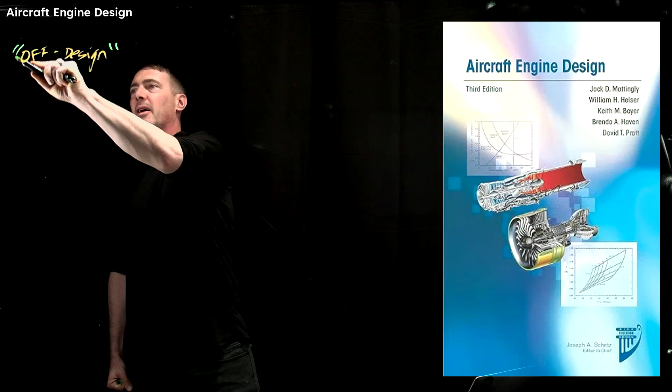And so, chapter 5, this is going to be really funny, but I'm going to call it "off design," and I'll put big fat quotes around it. Like I said in the last video, off design is basically where these jet engines live. It's never just perfect conditions. Your jet engine depends on altitude and speed, so altitude and Mach number.

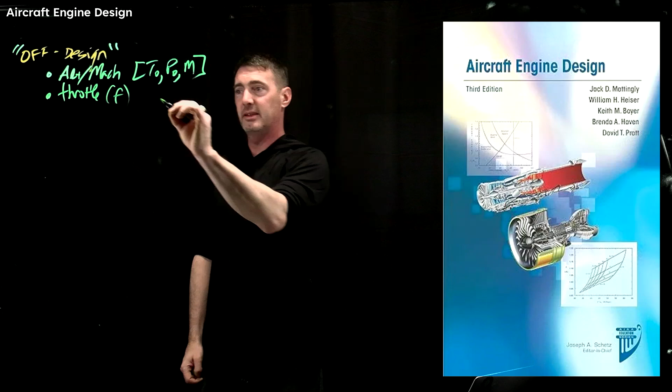Why? Because that's going to drive the temperature, the pressure, as well as that Mach variable, which everything falls out of. Then your throttle is nothing other than adjusting your fuel-to-air mixture, remember F back in the day. That's going to set your T4, and you can think of setting your T7 with your afterburner, AB. So your two fuels, fuel in the combustor and fuel in the afterburner, set those two temperatures, and that's the limit you pay attention to. This is your turbine inlet temperature, and this is your afterburner temperature.

The only other control you may have as a pilot is your nozzle ratio. If you have a pilot, the system can adjust it. It's usually automated; it's not that pilots are sitting there fiddling with their nozzle ratio. It's usually on a schedule, based on pressures and things like that. This is going to help set that P0 and P9 configuration. Again, back to jet efficiency being important. And everything else, the areas, are fixed. The consequence of that we'll show in a second.

But where I wanted to start is two really good graphs that I wanted to show you. The first one: Embry-Riddle Aeronautical University has this book online, Introduction to Aerospace Flight Vehicles. I think it's actually a phenomenal book. It covers so many things. I probably won't do that as a book club because I'm already doing a bunch of different portions, but it really is great, and this graph I've not found anywhere else. So I love what they've done here.

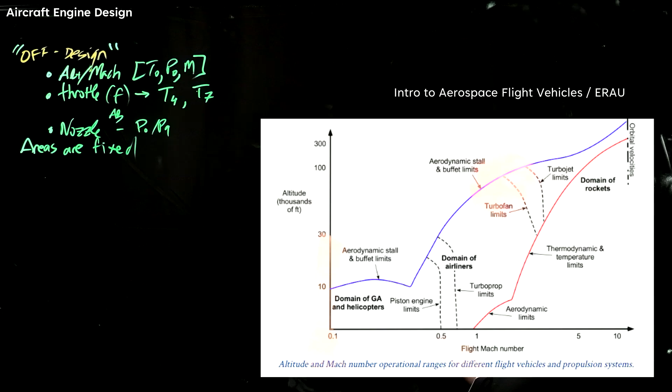Orbital velocity is actually Mach 25, so it sort of makes it appear like it's Mach 10 here. It's really Mach 25, which is probably the right line. Without the dash marks, you can't tell that on the log scale it's really at 25. So this is just a great diagram.

Now a lot of people will highlight this and look at it like, oh yeah, you can breathe air on your way to space. You can - that's this whole idea of scramjet, single stage to orbit.

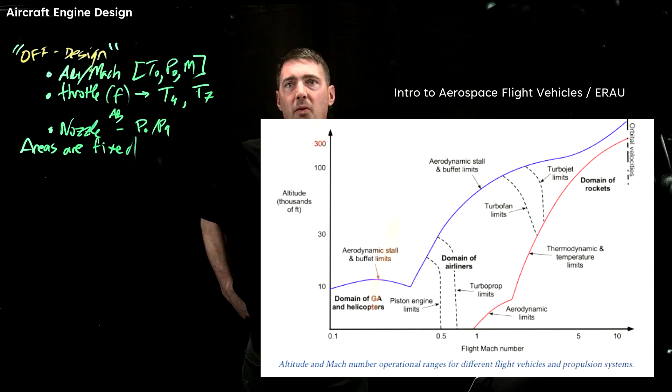There's other stuff in here. On scramjets, there's temperature limits based on the air getting crazy hot. So even burning fuel, where it's actually adding energy to the air, becomes really challenging. I'm not going to get into scramjet world, but just know it's pretty brutal. Honestly this is the standard thermodynamic curve. There's another one that pops up when you start accounting for skin friction, which I don't know that it's accounting for appropriately. It really starts eating your lunch.

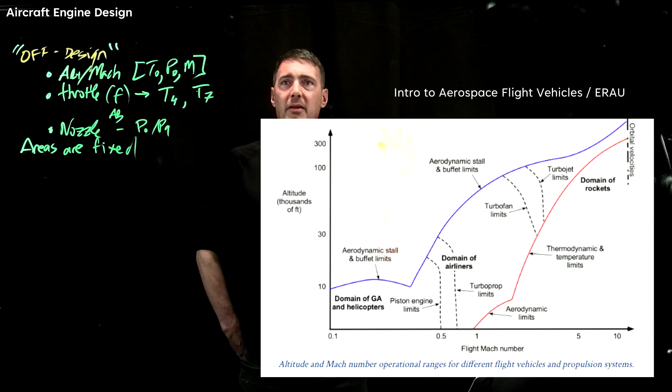All right, but this is a great diagram. Now the other one, I actually can't find the source. I was Googling for a picture that looked like this. I don't like dropping things here that I don't find the source to, so I'll put it out to the internet.

It just says 5.2, adapted from 1. This is the only picture that showed up on the internet. I would love to know where this picture sits so I can cite it properly, but this is basically your engine thrust to weight ratio, because there's your jet engines at 7. Afterburners usually give you double the thrust for a lot more fuel usage - that's usually the way it works.

And then ramjets here - I would love to know where this curve for ramjet is really coming from. So help me out, dear internet, help me figure out where this picture is coming from. I thought maybe because of the blue letters here, it was Raymer. This looks like an AIAA book, I just can't figure out which one. So please help me out, dear internet.

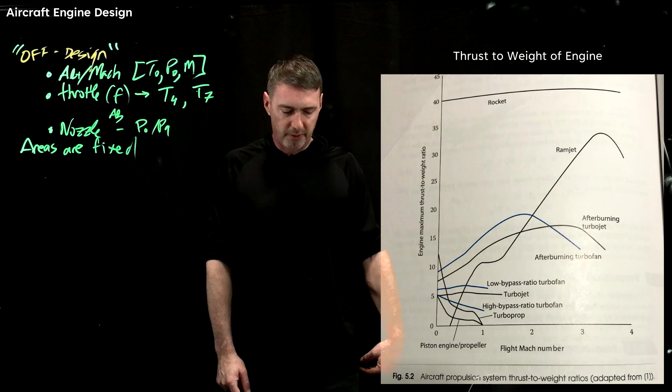Okay, those are kind of two great pictures cleared out to help out here. And the rest I'll sort of draw by hand to make sure I can highlight the right stuff. And so from all of this off-design, what you then have is a couple different things.

So you might look at the compression ratio of the fan versus m dot corrected. Now this is where I know industry has got these conventions, and I really hate them. It's not - if you're in the industry, it's okay. Some of the stuff is like industry does things that they may have done in the 50s and 60s because you can't have computers and you can't calculate all this stuff. But this m dot corrected one really drives me nuts. I'll just write it here because it is...

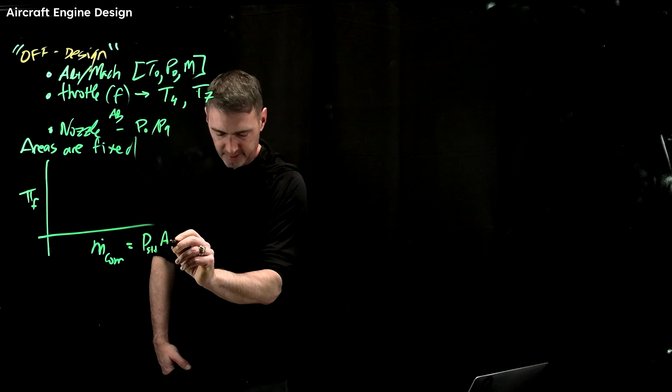...basically this: it's the pressure at standard times area over temperature standard, times this thing called the mass flow parameter, okay? And so it's supposed to be correcting the mass flow parameter back to standard pressure and standard temperature. Now, maybe this is from the jet engine testing world where you have these mass flow parameters of, hey, the engine's at this altitude, but we're testing it at sea level. I actually don't know the history behind this. I'll go dig with a couple of my friends who have worked in this industry, and I'll make a note below if I find out where the root of this really came from.

Because then you then ask, well, what the heck is the mass flow parameter? What you see is that it's just m dot times the total temperature, over total pressure, and the square root's only on the temperature, which basically undoes it. So the best as I can tell, the m dot corrected is just the m dot, unless I'm missing something. So this is the kind of stuff that bugs me - I don't really understand why.

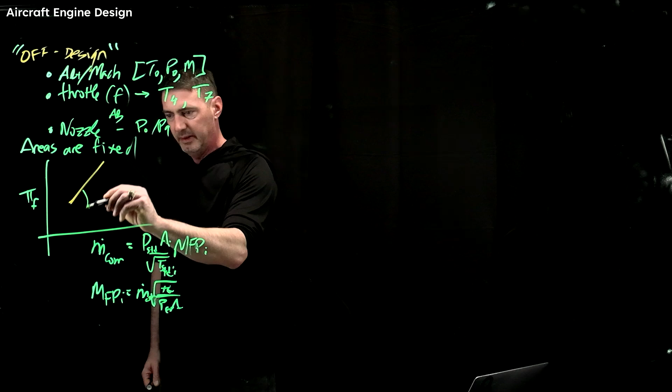But the main point of this was that here is your stall surge line, and then you're going to have the performance of your fan, and each one of these is percent, and then capital N - this is your RPM of your engine. So back to what you can actually control: your aircraft, you can fly it to different altitudes and Mach numbers. Your throttle is throttle, it's fuel. But what a pilot is going to do is operate the throttle, and the result of throttle is going to be an engine RPM, and that's what the pilot's going to see.

And so they're going to effectively adjust and talk about like I'm at 100% throttle, I'm at 50% throttle, and that would actually mean here is RPM, not necessarily fuel load. Okay, and then the control system is taking that input and converting it to a fuel flow rate, things like that. So it's a kind of scheduled system. So this is what's going to happen here.

Okay, and that's on the fan, and then basically the same sort of thing. You'll see the picture on overall compression ratio, which again I'll draw this sort of line. That's the stall surge. Your compressor can stall. It's a blade. We'll get into that in the next video on components. But your compressor is a blade. You can stall it, and you can surge it.

So then again, here are these performance characteristics of efficiency. So these are curves of engine efficiency, where you might want to sit based on your off design. Again, the altitude and Mach number you're at, you may actually be sitting on these weird systems where, again, I'll draw these in orange, where this is your percent throttle, your RPM as a percentage. Okay, so that's one.

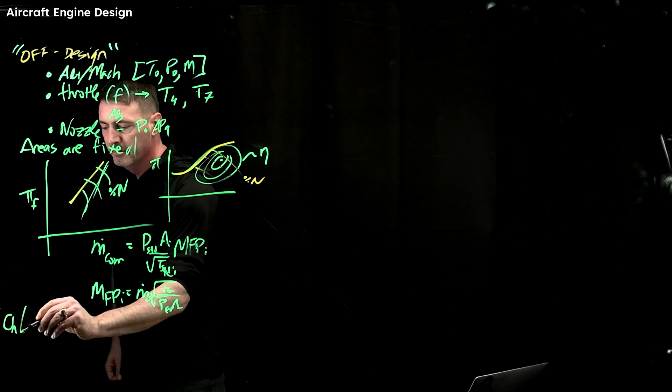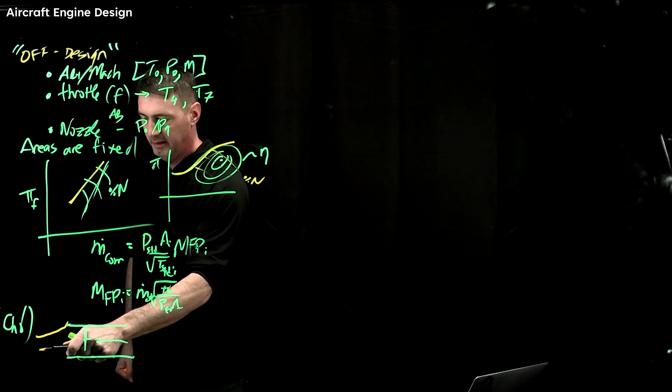Other off designs, and this is now kind of into chapter 6. So I'll do it here at the bottom, where hopefully you can still see. And hopefully you'll laugh with me: what do you mean these are off designs? Well, okay. So here's your engine. There's your blades and your core and all that stuff. Well, this is your inlet, and the air going into your inlet is not the same area. It could be down like that. At some speeds it could be up like this.

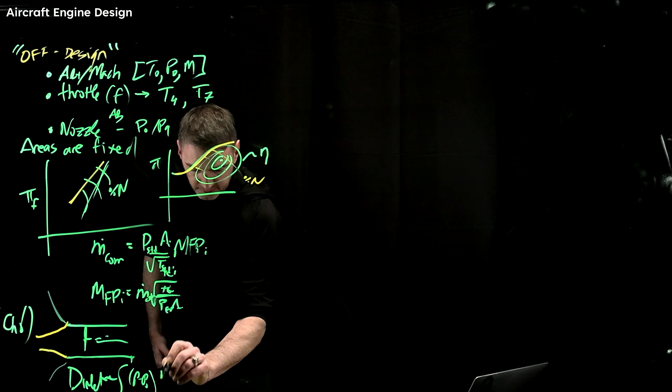So it's your inlet, and then there's also the drag associated with your inlet, which is the integral going from 0 to 1 of (P minus P0) dA. Your inlet drag can actually drive a whole lot of things. So what I'm going to show here is inlet drag versus Mach number, and it can show you a couple of different choices. Honestly, the drag numbers here might be only 4 to 5% if you have a very thrusty engine, if your F over m-dot A is 4. That would be like a high thrust F-16 style engine. Might be 4 to 5%, but could be as big as 50% if you have a wimpy engine.

If it's this large, I think 0.5 sort of a thrust. It's like the thrust compared to the flow rate of your engine. Basically, it's a way to show engine size, like frontal area, effectively the engine size. So it could be pretty damn large. All right. So that's inlet. That's on regular subsonic inlets, and then as soon as you go supersonic, they cover that in this chapter as well. Okay. So again here's your inlet.

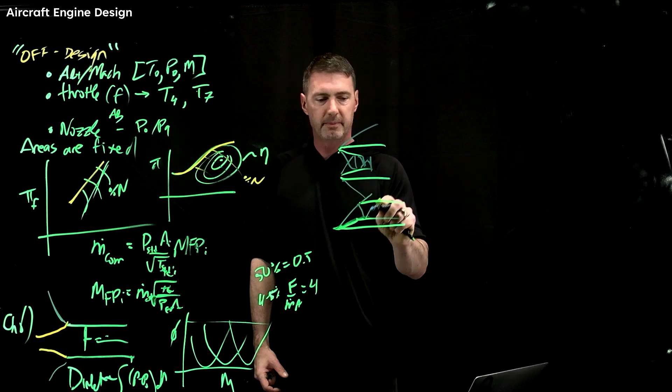The F-16 basically has a mouth inlet, and then you get these shocks. Okay, the shocks that stand up, and then you get a normal shock. So it's a very simple design inlet, but it builds up quickly, and then you can also get a shock that runs external off your engine, of course. That can also highlight your drag as well as affect your compression. And then there's internal compression, where you have a ramp like that, and you get that shock here, and then you have mixed compression.

Actually, I think I might have just drawn mixed. Let's see if I can draw internal. I think internal just tries to go to 1 to a normal shock. Okay, and so there is this mil standard curve. I'm going to harp on it here. It's looking at your pressure recovery compared to the outside pressure, and it's not perfect. And there's this mil standard that basically draws a quadratic through it.

Now, what I want you all to understand, and I also tell my engineers here at Venus, you have to understand that this quadratic fit, this mil standard, is from back in the day where, hey, if I'm an engine person, I need to deal with air that's been gone subsonic, right?

All of these jet engines are not supersonic jet engines. The inlet converts the supersonic air to subsonic air and gives you some compression. The jet engines have to start with subsonic air. Now, the result of it is the air is hot and it's compressed. And so the inlet's going to provide this amount.

You really need to read this curve, this mil-standard curve, as a quadratic fit so that the engine people over here can run a quick quadratic on their Excel spreadsheet, if you will. Again, you have to frame yourself like 1960s, a quick hand calculation. What is my pressure versus solving all of the isentropic compression with all the losses.

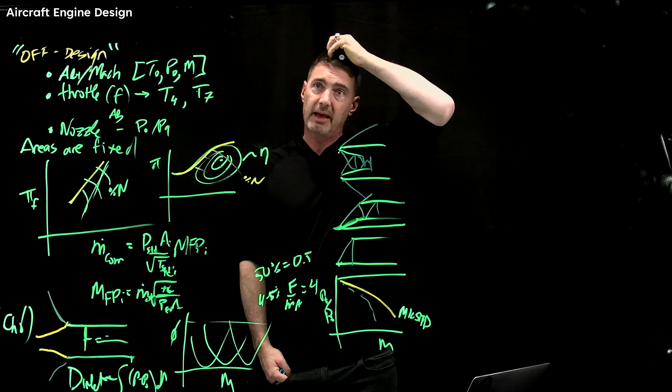If you have a chance, I think the book shows some of these really mixed bleed systems, because you can overload your engine at certain speeds and certain altitudes, so you have to have all of these bleeds that do all this stuff. And if you want to see an amazing engine inlet, go look at the SR71. Good gravy. That thing had so many different bleeds and checks and valves to adjust it, to keep this engine not only happy, but to have, through all of these quote-unquote off-design scenarios, this engine produce thrust. It's one of the coolest things ever.

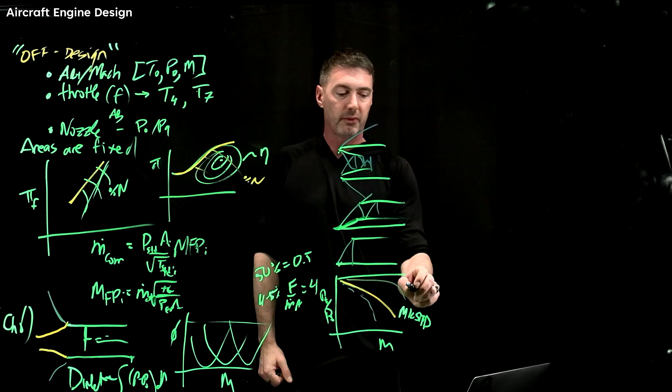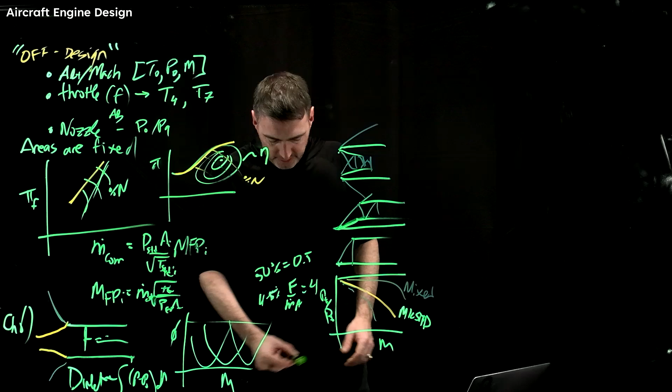They really did. And it's also possible to exceed this mil-standard through mixed compression. So don't get too hung up on this thing that's called the mil-standard. Just realize it was a quadratic fit that they did back in the day, and that your inlet choices can be both below it and above it. All right. And then other things, again, you have to account for.

Some of this is, if you hear someone use the word installed thrust versus uninstalled thrust, this is what they're talking about. As a rocket person, this makes almost no sense to me. I would never quote my engine as not installed, but I think it's a way of, historically, you hear my story about Bill Boeing and the Boeing days, the engine is separate. The engine is just this core thing inside you. You really need to frame yourself as Pratt & Whitney, Rolls-Royce, GE saying, we have this engine, and your installed thrust is really onto you, the airframer. Actually, that's the better way to think of why all of this stuff exists. It was sort of that ICD, the interface control document between company A and company B.

All right. And then the last one is boattail, which is the drag behind the engine. Right. So this is Mach. Let's say here's Mach 1. You can have a whole variety of sizes, and these curves going this way are A9 over A0. So yes, a small engine will have a smaller boattail, so you need to account for that.

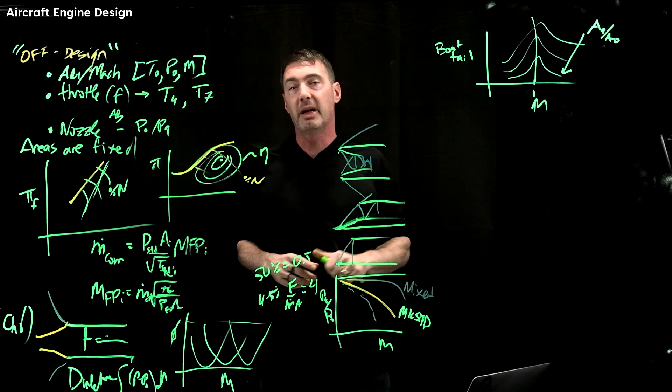In some ways, some of this is just because your nozzle oftentimes is not optimal, like your P9 is not equal to P0, and so you have that thrust term that doesn't get maximized. The other way to think of it is your boattail. Now, you may actually have your back area be bigger than the back of the nozzle. Sometimes you just have to get all of the things in there, the valves and all the engine stuff. So there are times where it's not just a thrust plume mismatch. It can also be that there is actually a wake behind this engine that you want to account for.

Okay, and then go read through some of the stuff there, where they really dig into the sizing of A1. And I'll just highlight that there's a lot that you do subsonically, especially towards the higher speeds that commercial aircraft are flying, Mach 0.8, Mach 0.85.

There's a lot that goes into sizing this to avoid a shock, so it's a good read. It's basically here that you're avoiding it right around the lip, because it's not a sharp edge, right? It's a lip, so there's a lot of stuff that they do there to avoid forming a shock. And of course, your aircraft can be at a whole bunch of different angles of attack. So really good discussion here on sizing.

And then, as I already mentioned, the back area, the other area of the jet engine, is sizing for all the other stuff, like electronics, and you've got to cool the electronics. So sometimes there's actually bleeds and things like that to go cool electronics. There's power takeoff - all these aircraft tend to want electricity to run all the things that they're doing. So it's not just this engine that's providing thrust.

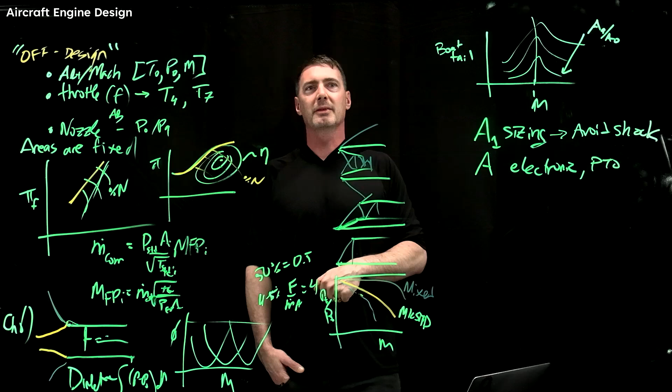You actually are providing electricity to the aircraft, and so that power takeoff does take up some space. You usually don't see it because it's kind of tucked away in the corner, hidden behind this big area inlet. But you know it's there - there's a power takeoff.

Okay, I couldn't find this, but this is figure 6.E6 in the book, which is what I'm going to sketch. The E means it's in the example section, and this is back to Mach number versus alpha, which is your thrust lapse. I couldn't find any good examples for this.

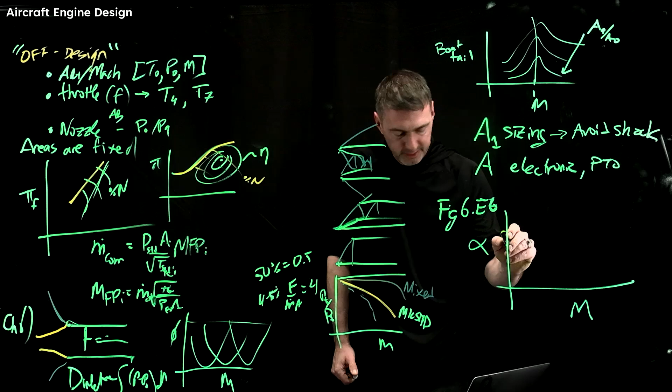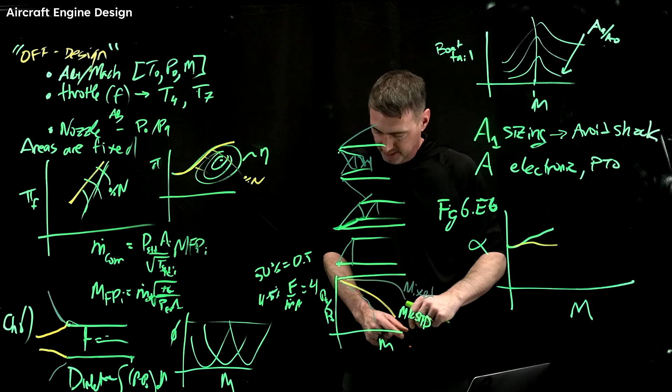Basically it was showing how this is the engine performance, and then this is sort of the installed version, and this is for military - mil standard - and this is for max, which just means afterburner on.

I don't know where those terms originate either - if you happen to know, put them in the chat. Mil power versus max power. As a non-fighter pilot, just a regular pilot, I actually would have inverted those two. I would have said max power is the max power of your engine, and military is like 'punch it,' like afterburners on. Anyways, if someone knows the history behind that terminology, let me know.

It'd be really interesting to hear. And they also have other figures for different altitudes and things like that, so go take a look at this. Not to steal too much of their thunder, but they actually do this figure for the engine they're designing, which is the important part. That's probably why I couldn't find any good examples out there on the open internet - some of this is engine specific, and then aircraft and integration specific, like this off-design installed thrust at non-optimal conditions for the engine, which to me is just hilarious.

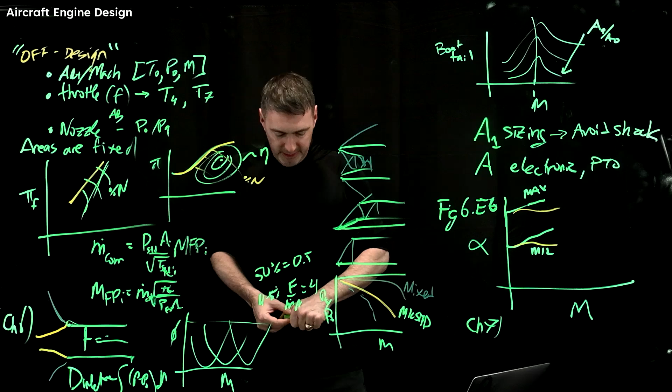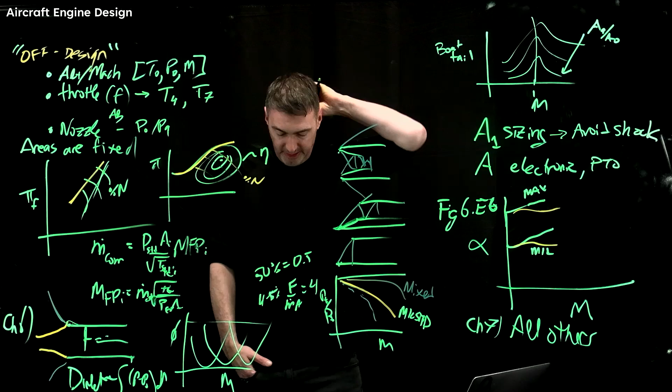Okay, and then chapter 7 is actually kind of a quick chapter. It's really like all other things - structural loads on the engine, bearings on the engine, lubrication, fuel, controlling the air system during start. Go read through some of that stuff - it all sort of makes sense.

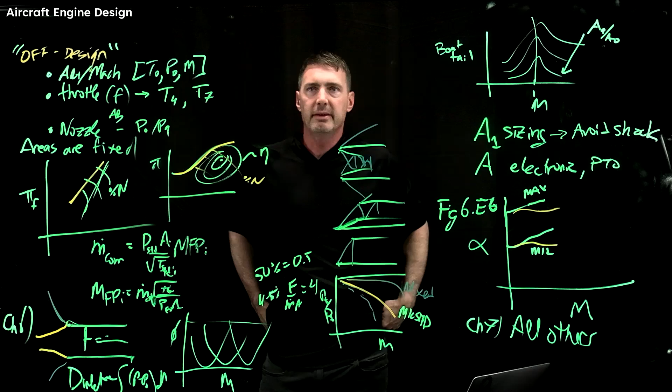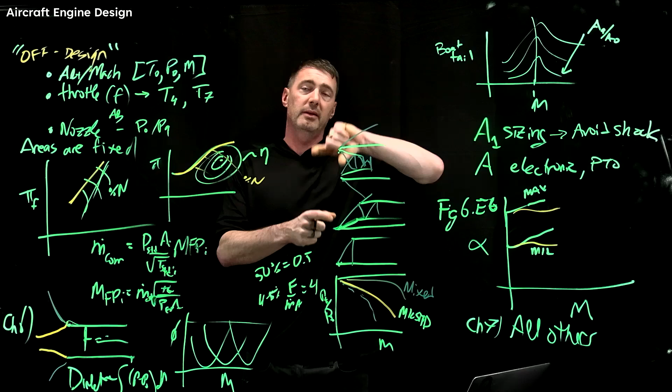We got into some of this in the Rocket book as well, where it's sort of like 'now for the rest of the story.' All of these things as engineers we want to say, hey, this is solved, and then you just assume that this thing will work, and then you finally talk to the bearing engineer, and they're like, whoa, this is not that easy, and it turns out to be a pile of work. So it's a good discussion. The structural one's interesting when you take a look at the loads these engines are under, and some of the design of the struts and all that - it's impressive too.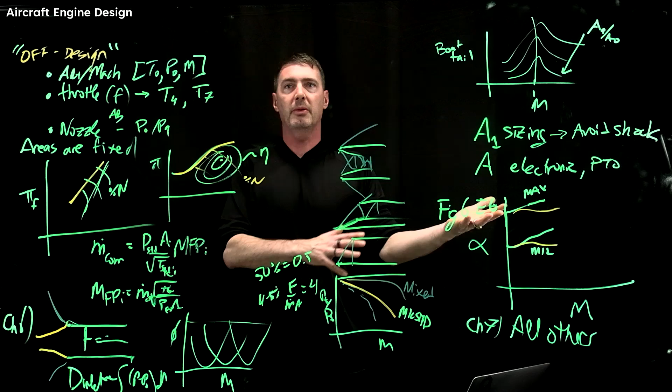Again, read the book, especially the examples, especially because in this case you're really seeing the difference as calculated for this engine in the example book - the difference between installed versus uninstalled, and again, all these off designs. All right, we'll see you next time.